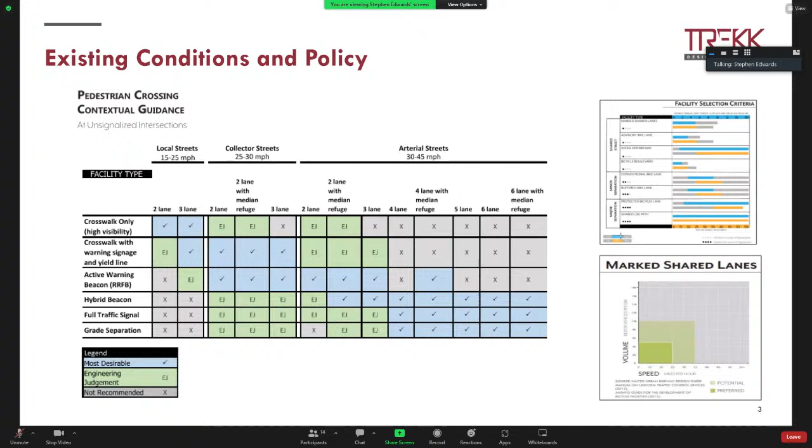Using that as our first step, we then did a peer review looking at 3 cities: Fayetteville, Arkansas, Columbia, Missouri, and Boulder, Colorado. These cities were chosen because they are all college towns with a very similar population to Lawrence, and their land area is fairly comparable. These areas were also all rated by the People for Bikes system and the Walk Score system, so you have independent agencies doing ratings and addressing how each city is applying different methodology.

Boulder, Colorado ranks very high in most of these facets, so it was a great place to adapt, look at, and understand how we can address and grow the facilities in Lawrence.

Each one of these cities provided specific guidance on how to design the infrastructure in the street, and very specific guidance on how to apply these tools and where to apply them. The decision for when to apply proven countermeasures is supported by tools such as the chart you see on your screen now.

This level of specific guidance, when coupled with design standards, provides a city with a starting point for budgeting a project and gives designers the needed tools to address the problems identified within the project limits. Additionally, these tools help ensure consistent and effective implementation efforts.

In this presentation, this is really an introduction to the project and an overall view from a high level. We looked at several different areas, and we have some general recommendations that we think Lawrence should look at to apply moving forward.

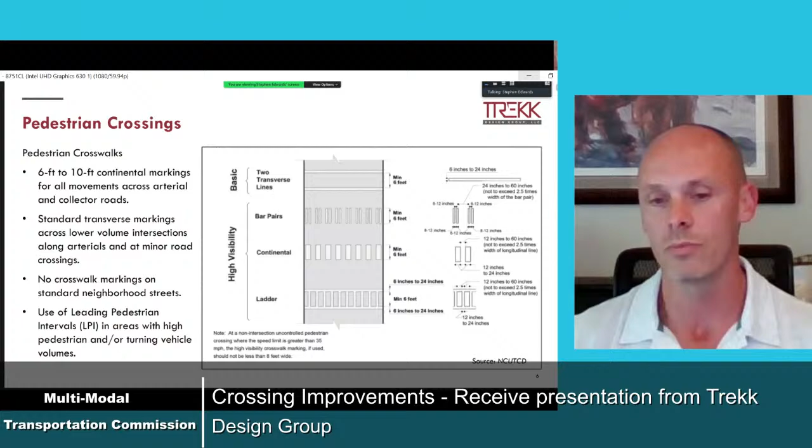For pedestrian crosswalks, you have the option of using continental high visibility crosswalks—those are the markings here in the center. Those are typically 6 to 10 feet markings, and usually it's recommended you use those at arterial and collector road crossings.

The width of those crosswalks is typically dependent upon the volume of pedestrians crossing the space—if you have a lot more people crossing, you want them to fit within the boundaries, so you make it a little wider. Another aspect you look at for crosswalk width is the visibility down the road. On hillier roads, or if you have corners and lose visibility of that crosswalk, you make it a little wider so you can see it from further away.

The standard transverse markings, shown up top, are the typical crosswalk used in most cities across the nation. You use those on lower volume intersections or along minor road crossings along the arterial. If you're going down the arterial and have local roads intersecting with a high volume of pedestrians, using transverse markings on those crossings makes sense, when it's not a signalized intersection.

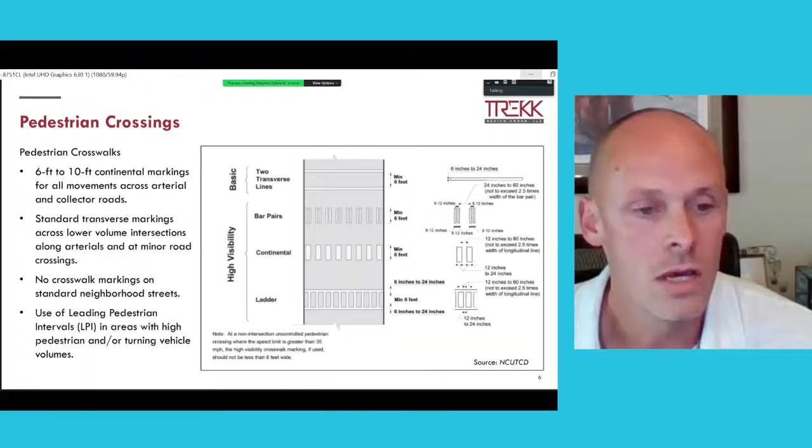On a neighborhood street within an actual residential neighborhood, typically you're not going to apply crosswalk markings. The cost and time to apply and maintain crosswalk markings in a neighborhood isn't justified, since the volume and speed on those streets should be low enough that visibility markings aren't as needed for pedestrian movement within that environment.

The last item on this slide is the idea of using leading pedestrian intervals, a signal timing method to allow the pedestrian to enter the crosswalk. You provide several seconds of time for the pedestrian to be in the crosswalk, typically 4 to 6 seconds depending on the width of the street, so the pedestrian can establish themselves in the crossing before any adverse movement is allowed. That leading pedestrian interval can be extended longer if you have a lot of turning vehicles—for example, many left turns, or if you're permitting right-hand turns and have a lot of right turns across that path, to make sure you avoid conflicting movements during that time.

Shared use path crossings change based off of where they are placed. On the screen you see a 12-foot continental high visibility crosswalk crossing.

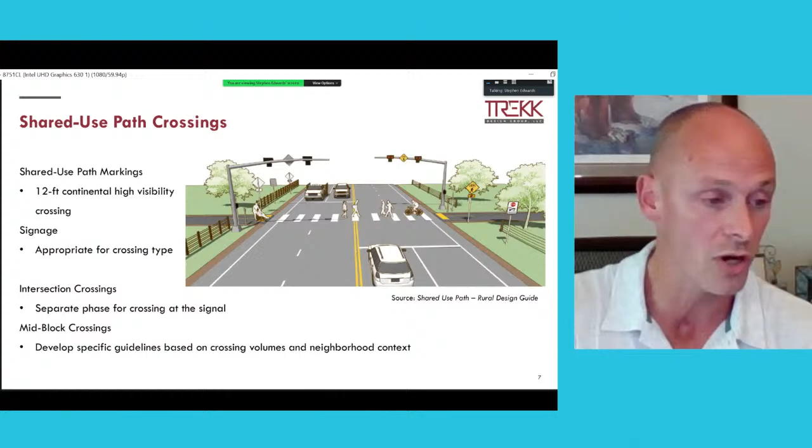The intersections may have to be modified based off of volume of turns, the overall volume of the system, and how everything works together. Typically, if you give a separate phase for that, the overall signal system often works better, because the time that the pedestrian is usually added into your green light for the road traffic goes down, and so the overall signal functions at a faster cycle time, and it just functions a little bit nicer.

So as we continue working through this process, we are going to develop more specific guidance on how to address these in these different contexts.

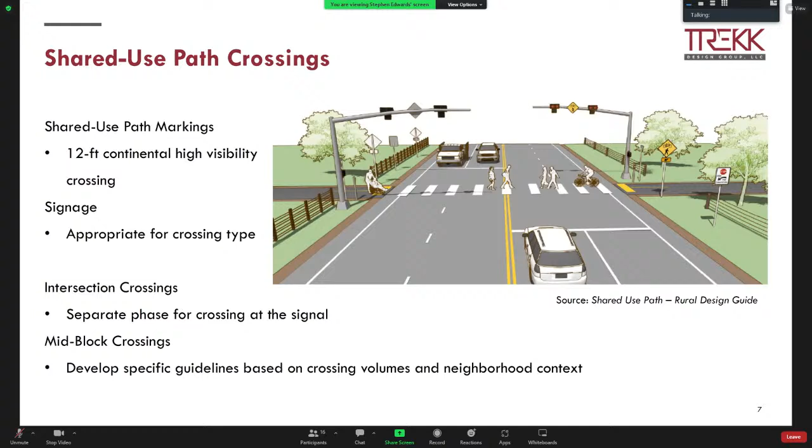Overall bicycle facility standards—how do you stripe these facilities? This is straight from the NACTO bike design guideline. This manual is, I guess, a national best practice. A lot of this was rolled into a lot of the FHWA guidance that has come out regarding bicycle design.

The determination of how much buffer space you use is something that having specific guidelines for will help with the design review process and how you're applying something standard throughout the city. So in one case, you're using something that's less than a 3-foot spacing, and you do not have to put these hatch marks or chevrons in those spaces, because less than 3 feet does not require that for visibility purposes.

Once you start expanding that, then you want to make sure that people understand that's not something you're supposed to enter into. Less than 3 feet, or a 2-foot marking spacing, allows you to just do white lines, which allows you to run your paint trucks up and down the street. The application is way faster.

But your cost for that actual implementation goes down also, so you're able to get a facility in place quicker, and you're also able to adjust that funding. So if you want to spend that money on armadillos—a small rubberized device that can go between the markings—it gives you a vertical delineation and also provides some type of hard barrier, so if a car strikes them correctly placed, it actually pushes the car back into the travel lane.

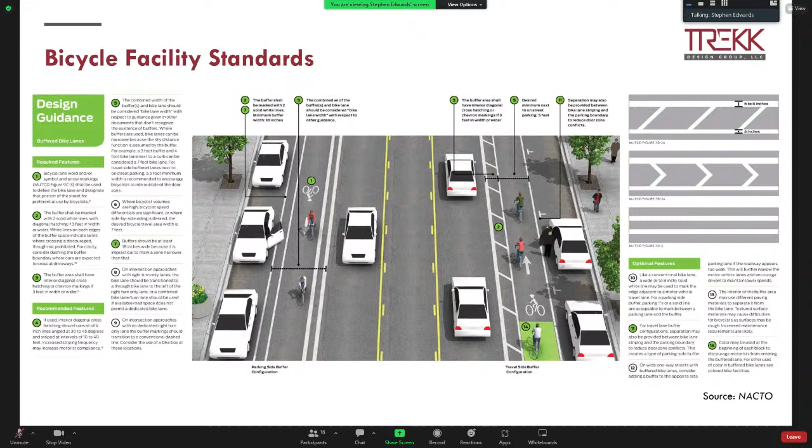As we're developing these, we'll also look at bicycle facility standards, making sure we have specific guidelines on how bicycle facilities, cycle tracks, and these paint types are used and applied in the street. One of everybody's favorites are green bicycle crossings. We adopted them here back in 2014, and started applying green markings throughout our major intersections.

We've had a number of times where people didn't think there were enough bicyclists on the road, and they didn't understand why you're building bicycle facilities everywhere, or why the extra cost for these things.

One of my favorite calls was a lady who was really happy that we identified the crosswalk on her street with extra green markings to make it very visible as she crossed, before she even got to the crosswalk. She thought it was a buffer giving additional attention to the pedestrian environment. So the bicycle facilities and these markings also provide a pedestrian benefit by making everybody more aware of the environment they're crossing.

Our general recommendation for these green markings, for them to make sense and be a cost-effective, safe solution, is that you don't want green markings everywhere. If you place them everywhere, they become second nature. Everybody's so used to them that they no longer have their natural impact on visibility. They become everyday things.

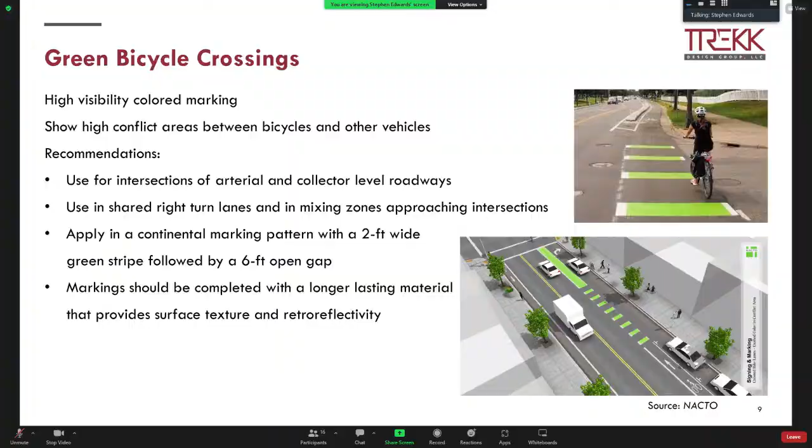Another benefit is that it doesn't look exactly like a continental crosswalk along the same road. So if you have people who are colorblind or have color sensitivity, they will not confuse those two crossings, which has come up a number of times based on some FHWA safety training I've been through. FHWA has now come in recommending this variation in style.

When you go to lower volume crossings - collectors meeting other collectors, or high volume driveways along arterials, like an arterial with an entrance to a shopping mall, if those things still exist today, or high volume gas stations - use chevrons to mark those. It's a cheaper alternative to green, and it's a lower incident area. So you're still bringing awareness, but not drawing away from the impact of the overall green paint.

This was really just to increase the volume of cars going through. A lot of our streets now have been designed to only function well if you have that right turn on red capability. So there are different changes you have to make with signal timing and even the space that holds vehicles on the street.

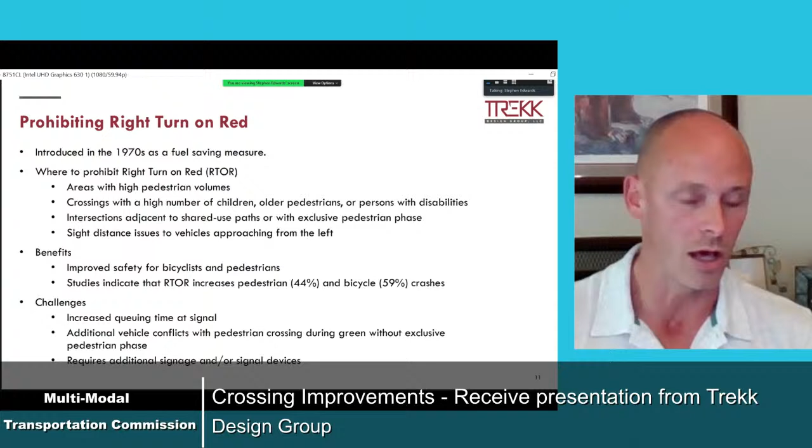So you have to have a red arrow signal up, like on a shared use path, if you're not allowing people to turn right across that shared use path a lot of times.

So where you're going to look at prohibiting right turns on red are areas with high pedestrian volumes, any type of crossing with more vulnerable users like children, older pedestrians, or persons with disabilities, intersections adjacent to shared use paths or with an exclusive pedestrian phase.

During that leading pedestrian interval, you would have a no turn on red. You would need a sign stating that and possibly a signal indicating that, or any place where sight distance may be an issue for vehicles approaching from the left of that crossing.

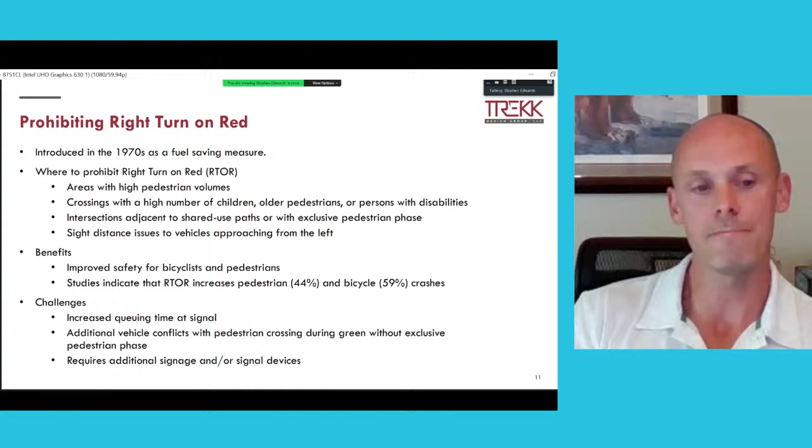So the benefits are stated here on the slide. There's an improved safety benefit for bicycles and pedestrians, where they show that right turn on red actually increases pedestrian and bicycle crashes by 44 to 59%, respectively.

Now your challenges, as I was stating towards the beginning, is the space that you have for cars to be parked there waiting for the signal to progress. If you have vehicles sitting in that space for too long, a lot of times those people will start running lights. So you have to address your phasing and timing to make sure that everybody at the signal behaves in a reasonable and rational manner.

You also have additional vehicle conflicts with pedestrian crossings during green without exclusive pedestrian phases, and you have additional signage and signal devices.

This was actually borrowed from the city of Seattle, and this same flow process is now used elsewhere. I think what we've found is that 28 cities and 13 states are using this for the road diet process. So engineers and planners, we all like to borrow from each other quite a bit.

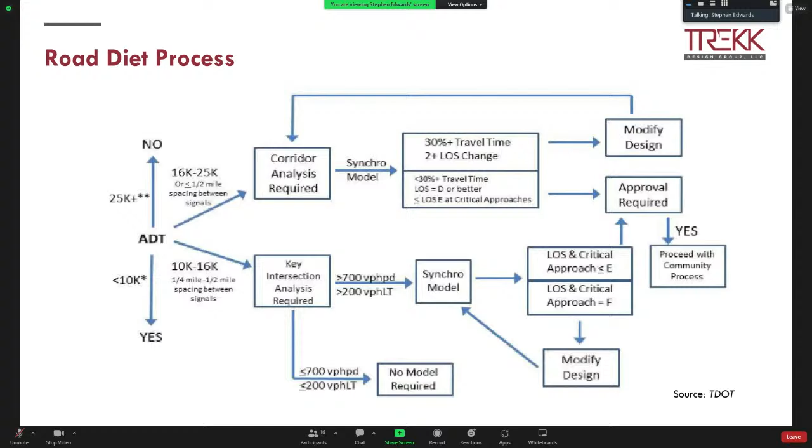Another item to think on is interim design strategies. As you're resurfacing roads, that's your fastest and easiest way to start retrofitting your streets in your city. As you're retrofitting, you're changing to bike facilities and modifying these streets.

The city did all the white and the yellow striping, which would be what we would have typically done at that time. The private group hired a contractor that went through the land development process to do the rest of these installations. What this allows is you to retrofit a street.

This was designed and implemented in less than 4 months. It went through a public process, and everything went into place. This was all built.

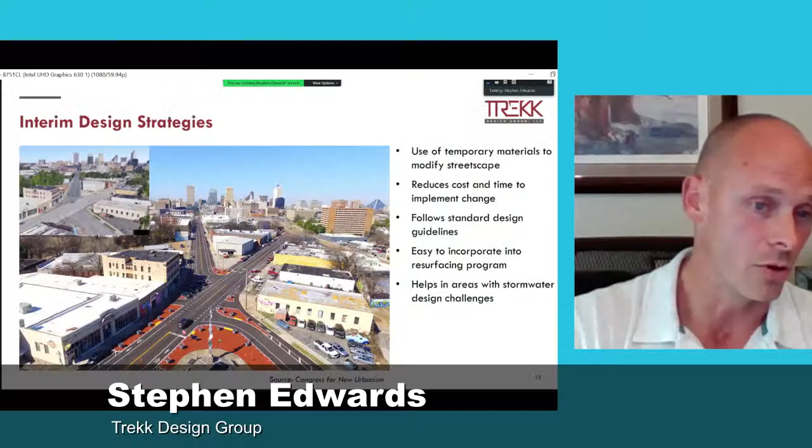This area at that time had no development. It was pretty much all empty. And now, I didn't include a new picture in here.

We won awards from Congress for New Urbanism for this project, but that's where I got the picture from. This area now has been completely redeveloped. There's not an empty building on site. Every hole has been filled in. It's full of people all the time.

So this is one way where, as you're changing the context of the streets and developing something safer for pedestrians and everybody, you can do these interim design techniques quickly. This is using a material that's used in Chicago, New York City, and a number of places, and a lot of these installations have been in for over 10 years now, and the maintenance has been exceptionally minimal. So while we say these are interim and temporary, these things actually last a long time.

And in New York City, they do this. They actually have no intention of ever replacing these, because their snow plows wouldn't be able to go up and down the street if you move the curb. So they built these to where the snow plows can operate, and then they just go out there, they move all the planters, and they put the planters back once the plowing's all done. So there's different applications you can do, and it makes it easier to run through.

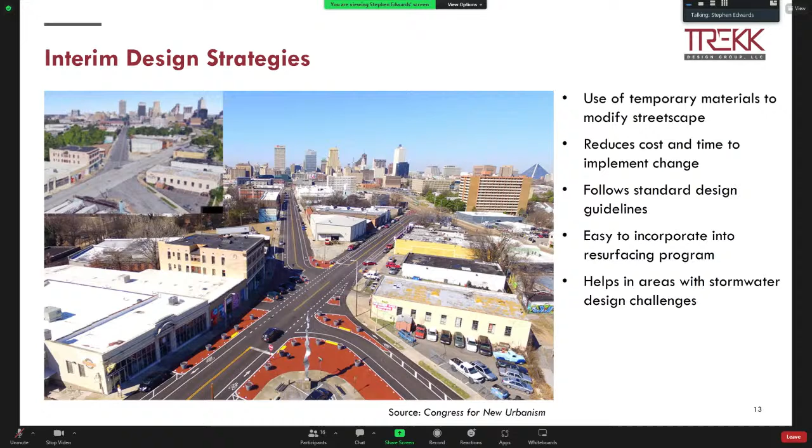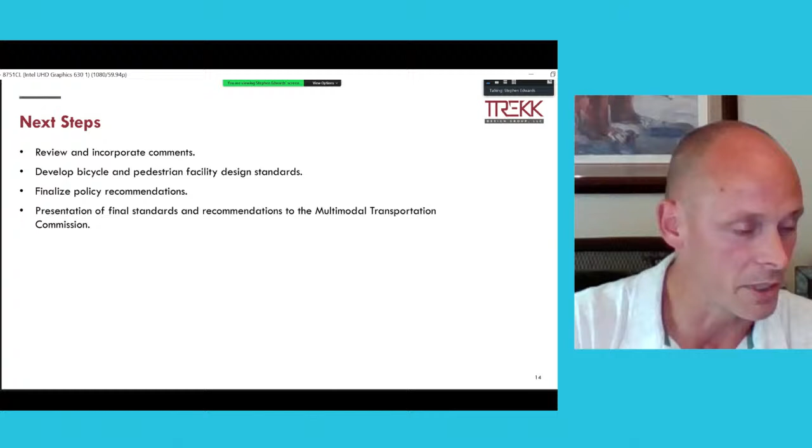So the next steps on our project are to review and incorporate any comments from this group and other groups that are provided by Lawrence. We're going to develop the bicycle and pedestrian facility design standards and finalize policy recommendations. And then we'll be back in about a month to present our final recommendations and standards for your review and comment, and proceed from there.

Do we have any questions? Any questions from commissioners?

I have a couple. The first one, in looking at the charts listed at the beginning of the presentation, I was wondering if it's possible to have a few examples, like 3 or 4 or 5 intersections in Lawrence that would have the traffic counts and pedestrian counts, so that we could have an idea of where those would fit in those criteria for those different applications.

Okay, so just doing a couple of demonstration locations where we could run through, we can provide recommendations and then develop a couple of conceptual demonstrations that you can see how they would be applied.

Correct, because it's difficult to look at the graphs and know what those thresholds are, and whether we're anywhere near those in certain intersections, and for the different kinds of treatments, what that recommendation would look like. Yeah, that makes a lot of sense.

We've looked at this before and used this as a guideline on other things we've done. I think when we looked at the crossing at 7th and Tennessee, we kind of looked at whether this fits the criteria for an RRFB. So that's an example, but I think we could do that — looking at the crossing guidance with different examples, and maybe provide that at the next meeting. Okay, great, thank you.

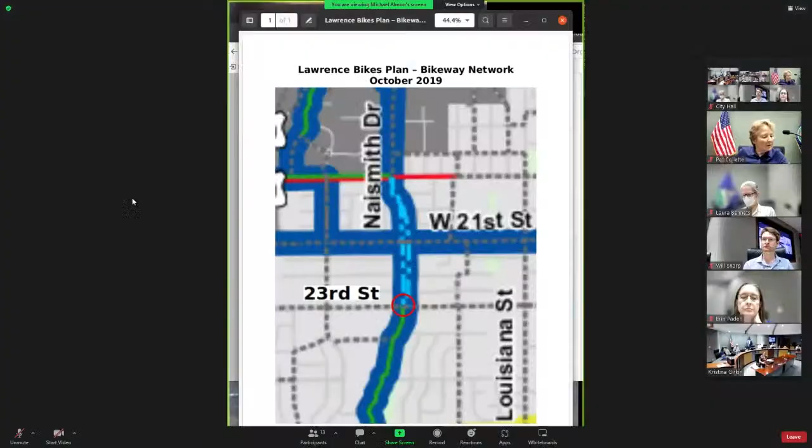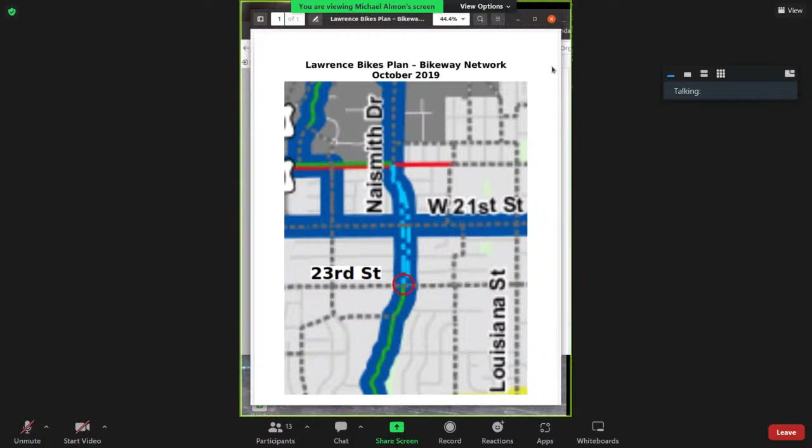There's a view of that red circle, 23rd and Naismith. It's a convergence, this is the Naismith Valley Trail. This shared use path is going to be built along Naismith up to 19th Street. But now let me stop sharing that and share this instead. There's the Naismith Valley Trail.

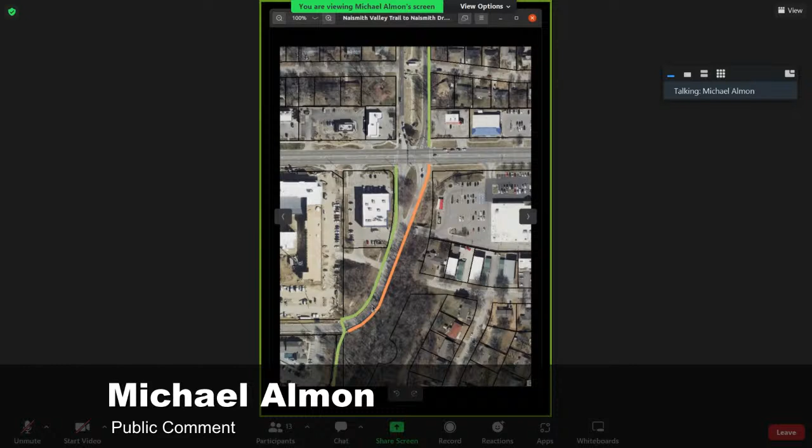It jumps across Naismith at this curve and then goes on the west side. The new shared use path is going to be on the east side of Naismith up to KU. A few years ago, when the proxy development was being built, Commissioner Stuart Boley suggested that this trail, instead of going across the street, continue on the east side up to 23rd Street. When this intersection is reconfigured, that's the time to do that. That would have the alignment continue consistently on the east side of Naismith.

This is also a nexus of bikeways. The proxy developer dedicated room for a shared use path along here. And if you recall that previous slide, 23rd Street is designated in the bikes plan as a future bikeway, so there'll be a bikeway coming across here. This intersection needs to take into consideration more than motor vehicle geometrics. I don't know what the intention is, but I think the Multimodal Transportation Commission should inquire about that.

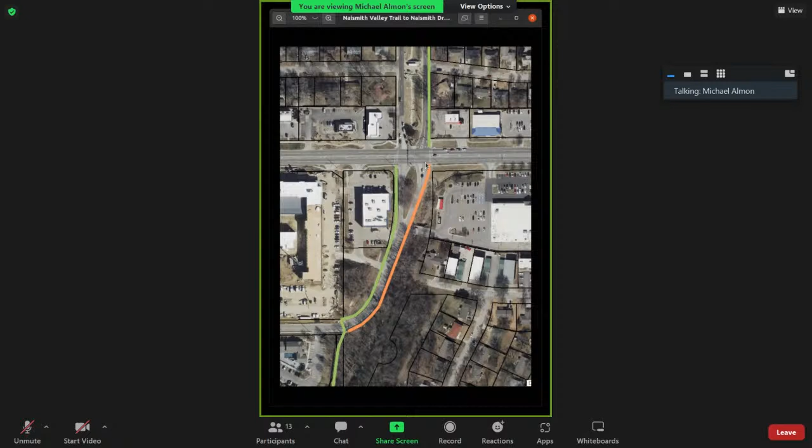We just talked about intersections. Let's design the intersections to do the safety we want to see for pedestrians and bicyclists, instead of retrofitting them later with green pavement or no right turn on red or whatever. Let's do it right to start. So that's basically my comments, and I appreciate your attention. Thank you, Michael.

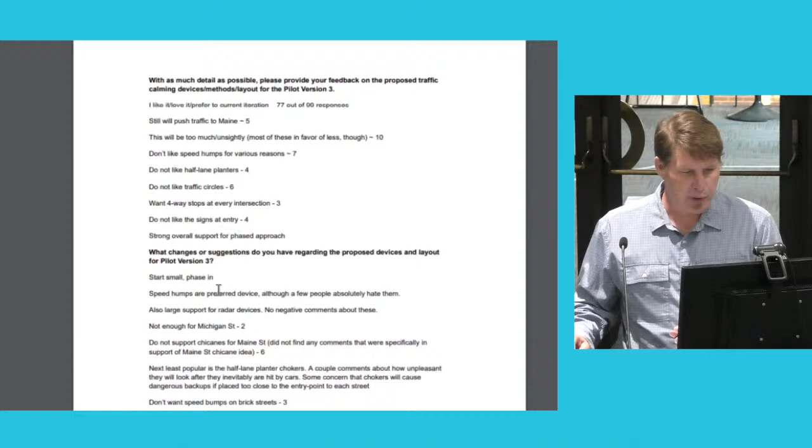I'll show their plan while we're talking about that. Their plan was the last attachment on this item. The neighborhood provided their plan and those survey results to us at our last meeting, I think last week.

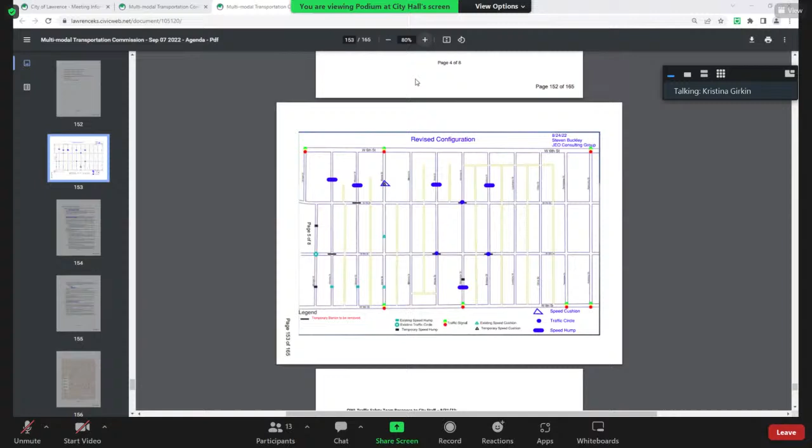At the same time, while the neighborhood was developing their plan and doing their engagement, we, the city, and our consultant JEO were developing a revised plan based on feedback we've heard throughout the process from the public as well as the neighborhood. Our revised plan is informed by neighborhood preference for speed humps—they like them, they think they're effective—so we leaned in that direction.

There's also strong neighborhood opposition to anything that restricts turn movements at the intersection. So we would recommend removing the median barriers that are out there now that restrict turns at several intersections, and replacing some of those barriers with small traffic circles—a calming effect, but not restricting turn movements, in line with the request from the neighborhood.

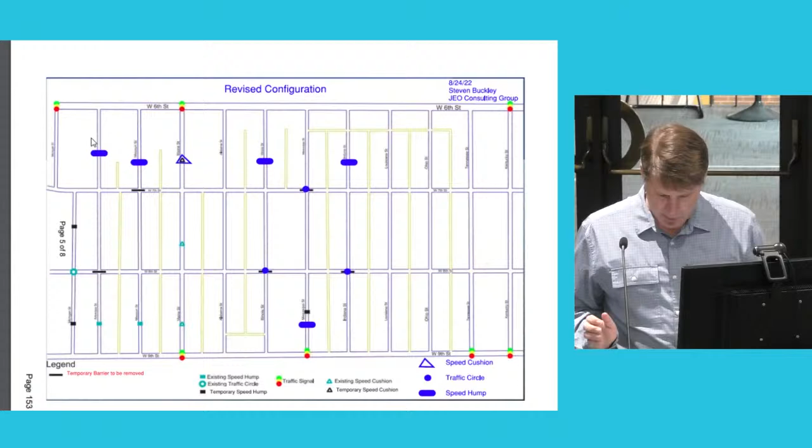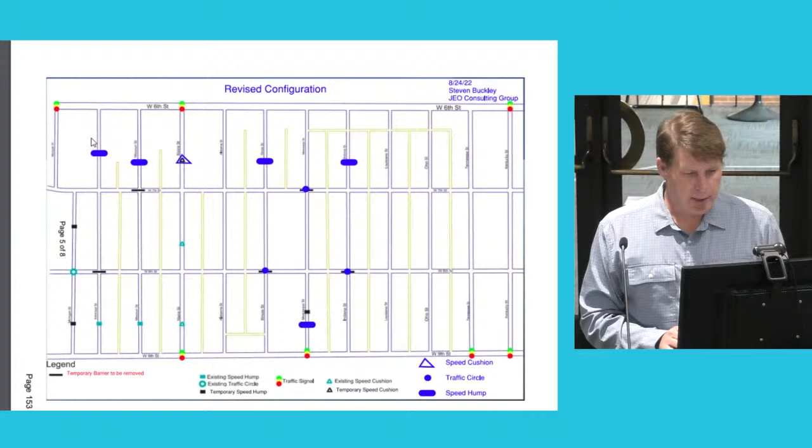So what's on the screen now is the city and JEO revised plan. It includes 6 speed humps or cushions and 3 small traffic circles. Now scrolling back to the neighborhood's plan that they've developed, it includes 12 speed humps or cushions and 6 circles.

Their plan also includes 5 half-lane chokers, which would be like a curb bump-out to restrict the width of the roadway on certain entrances to the neighborhood. And then they would also have 2 of the digital speed feedback signs, I believe both on Maine Street as you enter the neighborhood from 6th or 9th.

The neighborhood has requested to do a pilot of their full plan, similar to the 2 previous iterations we've done, where we would try to configure these traffic calming devices using our temporary materials, collect another round of data, potentially a scaled down data collection effort focused on the higher volume streets of Michigan, Maine, and Mississippi.

Moving forward, we have a meeting scheduled for next Thursday evening again with the neighborhood, city staff, and JEO to continue the discussion of our plans. We'll have cost estimates for both plans at that point and try to fit that into a schedule of being able to implement and complete this year. With that, I'd open it up to questions for myself or Dave.

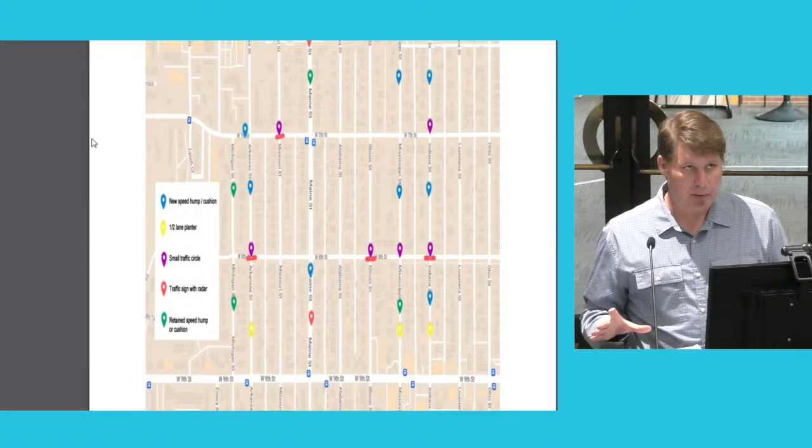The other challenge is both plans are recommending small, like 20-foot diameter traffic circles in the intersections. The 20-foot diameter would be the traversable apron that larger trucks and emergency vehicles could traverse, and then there would be a smaller, 6 to 8 foot diameter circle that's a barrier you could not run over, fitting in the footprint of the existing intersections. But we have not determined a way to configure those in a temporary manner. The traversable apron is the challenge of getting the right impact for smaller vehicles to navigate while still being traversable mainly for emergency vehicles. That's another challenge with implementing either plan in a temporary configuration.

Getting accurate speed data would be difficult, but we could get volume data. In our discussion, the neighborhood will have comments, but what we heard is they want, when we put in the current configuration, it diverted traffic to Mississippi, Maine, and Michigan. If we were to remove those, what we've heard at our last meeting was the ability to go back and say the volumes would spread across the streets as they were before we had those diverters. We've seen volume increases on those streets, Maine, Michigan, and Mississippi, and that was part of the data collection discussion we talked about last week, to show that volume has gone back down on the streets that were diverted under this last installation.

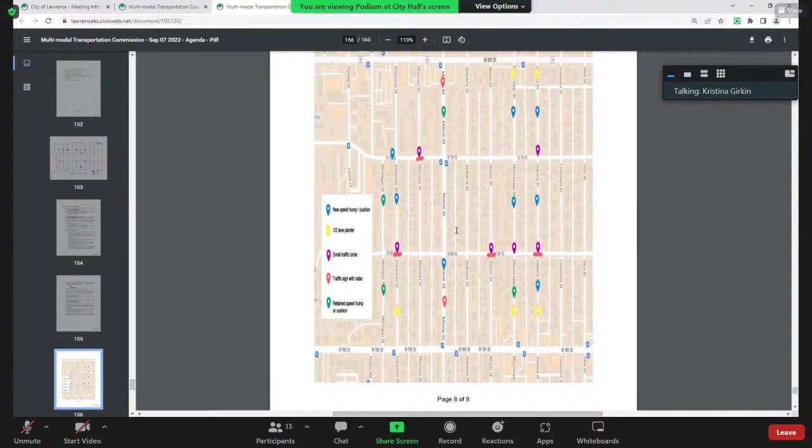How about the planters? The half-lane planter, they have five in this proposal. Is that something that would be easy to construct, to be able to see how that impacts traffic in there? I believe so. It'd be similar to what we've done on 21st Street Bike Boulevard, where we've got little islands and constricted the lane, kind of where parking would be. So that would be a matter of using the rubber curbs as well.

So I guess my thinking on this is this is our pilot for this whole program, and it needs to be a process where we're working with the neighborhood to figure out what's best to calm traffic neighborhood-wide, not just on a single street. Before this, traffic calming was taken on a street-by-street basis, and sometimes had a spillover effect because it wasn't thought about in a broader context. So I still feel like we need to stay the course of trying to think neighborhood level instead of street level.

But it also seems like we're needing to be careful to set expectations right with neighborhoods, that it is not an unlimited budget. And there are rules that have to be followed for what sorts of traffic calming is even appropriate on any given street. But within that, I think it's okay to go past the budget and create a list of unfunded elements of a plan, which is fairly common. The question of funding, I would hope, doesn't get in the way of getting clear on what would make sense for the neighborhood. There's lots of ways to think about funding. A lot of that's not in our place to decide.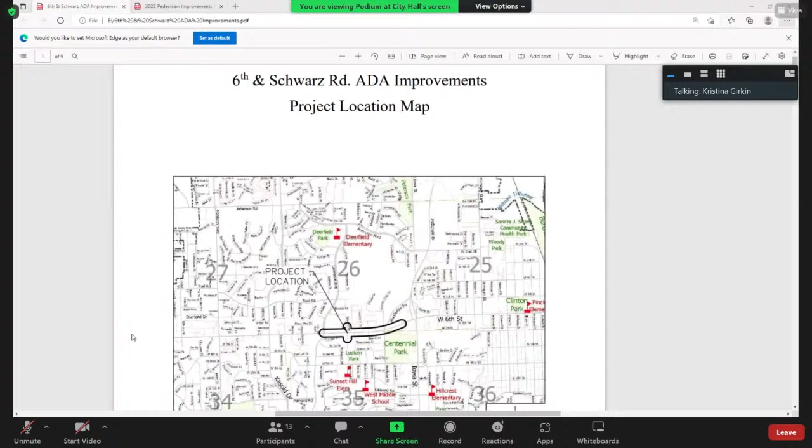The timeline for this project: we currently have the office check plans. After we've gone through those, we plan to make the revisions and put it out for bid. We're hoping to begin construction in spring of 2023.

So if we look briefly at the map of the project location, the top of the screen is north. We can see going from Lawrence Avenue, moving east just past Rockledge, and the intersection reconstruction at the intersection of Schwarz. I'll be going briefly through the plan sheets to take a look at the project more in depth.

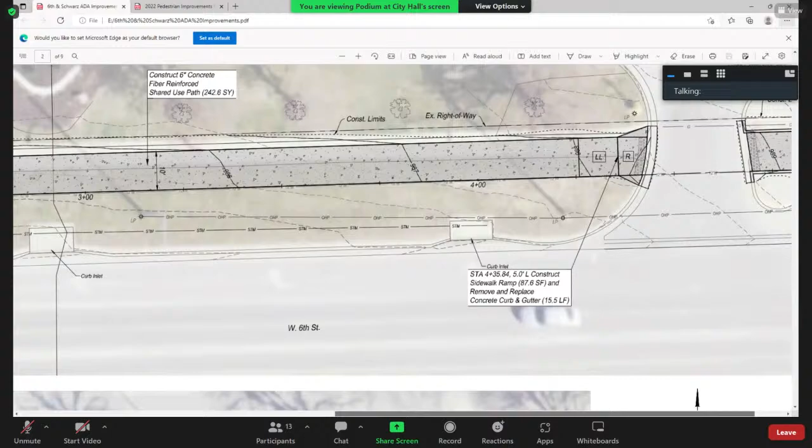So we're going to be beginning at the intersection of Lawrence Avenue and 6th Street with the construction of this ADA ramp, and begin replacing this 4-foot sidewalk with a 10-foot shared use path. Moving east, we'll come here, it's going to move through the entrance of the Dillon's parking lot, the west entrance.

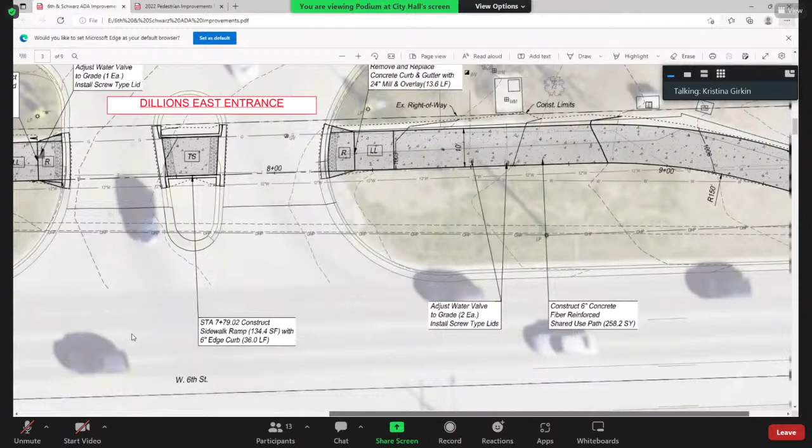Next plan sheet, we continue along, going across the east entrance of the Dillon's parking lot. Continuing along with the shared use path, we have our intersection at 6th and Schwarz. We'll be looking at that a little more for the reconstruction plan sheet. But for now, we're just showing it continuing along the north side of 6th Street.

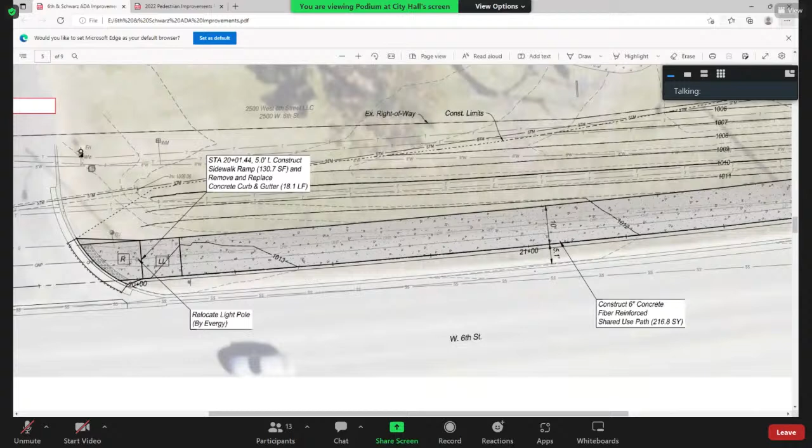And again, continuing along from the intersection at Schwarz, we have a reconstruction of the apron to make sure it's ADA compliant as it continues along our shared use path, as we go across the Tuckaway apartment complex. Continuing along, another approach is being rebuilt as we continue our shared use path, still at Crestline Drive, leading into an apartment complex.

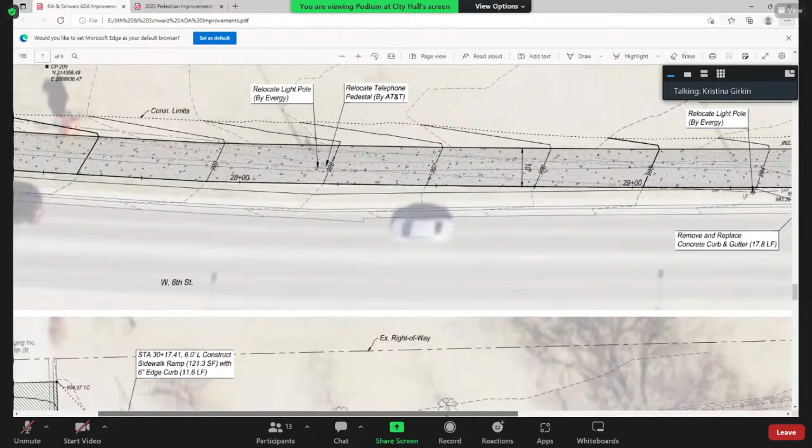On the west side, here's the east entrance to the apartment complex, again rebuilding approaches as necessary. Continuing along, we have our ADA access ramps, our crossing going across Rockledge Road, and continuing to the east, we'll come to the end of the shared use path, as you can see along here at Garber Automotive.

We will be tying into an existing shared use path that exists over here on the east end, and that'll conclude the limits of construction going west to east. On this final plan sheet, we have the intersection being reconstructed at 6th and Schwarz, putting in the new ramps and crossings and everything to make it ADA compliant. So that's a synopsis of what we're doing in the office check plans we're looking at. Do you have any questions?

I have a few, so sorry. This is my neighborhood, so I'm pretty familiar with it.

Kind of related to our study session, in terms of the markings and pedestrian amenities across the major driveways. For instance, Dillon's is one where it's a very wide entrance at two places, and whether those will be marked with crossing markings in those areas where there's higher volume.

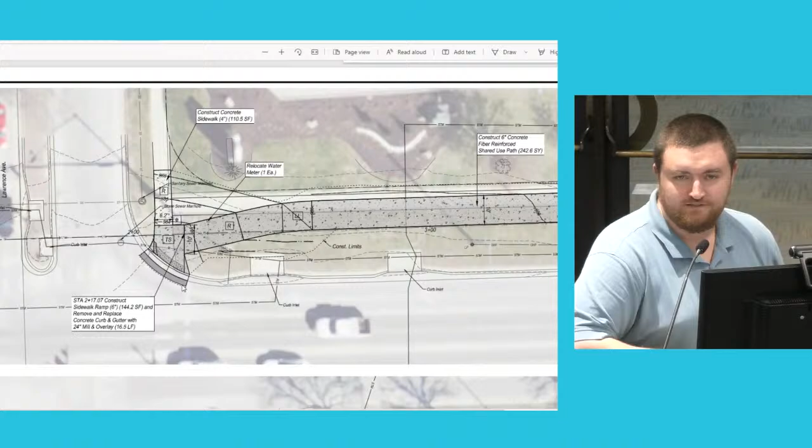Okay, great. I couldn't quite see where it was pointing to, and I didn't think all the rest of it was concrete that you were replacing with mill and overlay. That's on the crossing street itself. Yeah, okay.

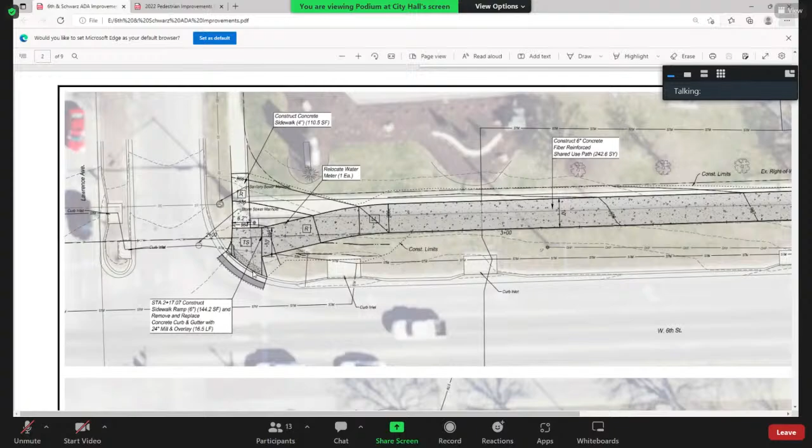And in general, at the signalized intersections along the way, in a couple of places I could see where the signal pedestals were placed, but there are several places like at 6th and Schwarz where it's very difficult. Where it is now, it's on a pole on the northwest corner, and it's difficult if a cyclist is coming up on the street to get over to trip the signal.

You have to get off your bike, and then if you don't make it in time and it turns green, by the time you get back on your bike again, it's a short signal if the pedestrian button hasn't been pushed, and so you miss the light.

So I just wondered whether you're going to do like you've done on other intersections, where you have a pedestal that's more accessible to reach either from the sidewalk or the shared use path.

We can make a note of that, but all the ones that are currently planned to be installed are going to be ADA compliant, so they're meeting all those regulations.

Yeah, in instances where we've had to move the curb ramp or realign it, and we've had an existing button, it wasn't ADA compliant. Sometimes you need to have a level landing area next to it, 4x4 I believe, and it needs to be within a certain proximity of the ramp.

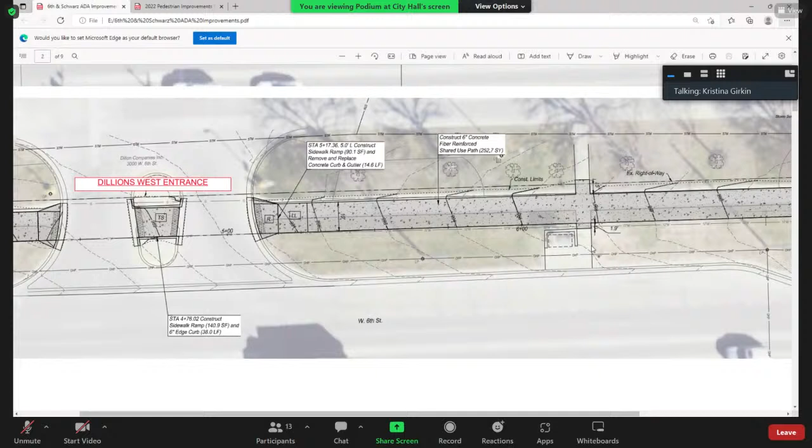I have a question about the entrances to the businesses. You mentioned that you don't typically put any treatment there for people crossing that entrance. Is it possible to keep the crossing elevation the same so it essentially heightens the visibility of pedestrians, or will they be expected to walk down into the street level or the entrance level?

I'm not entirely certain. Was there a crossing in particular? Well, you were mentioning Dillon's. Just wondering, would it help at all to have the pedestrian path stay level as it crosses those entrances?

That's a good catch. What these plans don't show is pavement being replaced through those Dillon's parking lot entrances, and I don't think our designers have shown that as an ADA compliant pathway. So I envision that being a change on the final plans, with that pavement reconstructed to a cross slope that's compliant.

Well, I was thinking more of just maintaining the level of the sidewalk, so instead of sloping down, keeping it straight, and cars can drive over that. The stormwater, for the city, would still be in the street—the parking lot is Dillon's problem. Right, essentially the existing curb line is going to stay at the same elevation. You'd see some minor tweaks to get the cross slopes needed for the ADA ramps, but otherwise it would be staying at the same location.

Hi, this is Drake Prebyl. I had a couple comments to make on this item I'd like to bring to the Commission's attention. First, at the very east end of the project, next to Iowa Street, where there's the existing shared use path, there's not currently a crossing—like the bump mat for blind people—to see where the edge of the curb is. It seems kind of silly that we build the project right up to where we left off and don't finish that end off. And then the other thing is I appreciate all of Charlie Bryan's comments regarding the raised crossings.

There are several business entrances and residential entrances along this street, and one of the biggest dangers for pedestrians and cyclists is cars turning in and out quickly without looking. So anything to help draw attention to the crosswalk is a good thing in my mind. Other than that, I'm really looking forward to this project—this is an area that really needs it, given the amount of bikes I see on the sidewalk already. Thank you.

Is there any possibility of adding in—I know it wasn't in the project scope—but is there... It's a commercial entrance. We don't typically put detectable warnings on commercial entrances, that's correct. I took note they're kind of shown that way on the plans, to have warning panels, but typically our standard is not to include those.

Those are for public intersections—we've not included them on commercial driveways. There are instances where they've been put in before on site plans, but our standard is not to include those on commercial or residential driveways. So we do see those all over the place though—those shouldn't be there in any of these illustrations? They should not, on commercial or residential driveways.

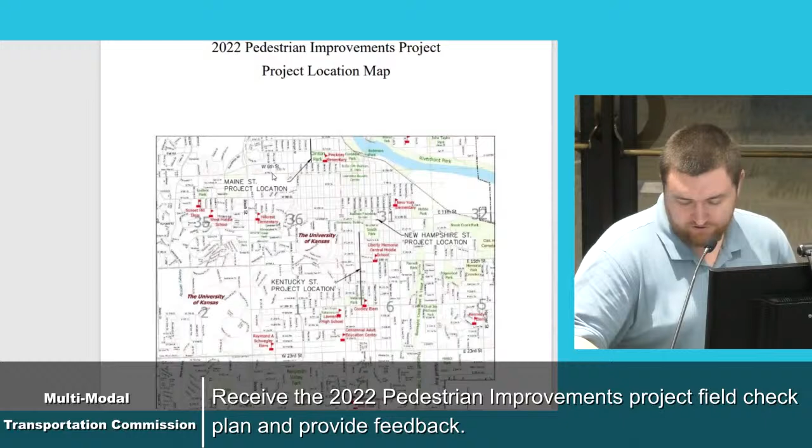Okay, I'll be presenting these as well. Anthony Schuler, project engineer with MSO. These are the field check plans for the 2022 Pedestrian Improvements Project. This project consists of 3 components: a sidewalk replacement along Kentucky Street, filling sidewalk gaps on Maine Street, and the

installation of 2 crossings on Louisiana Street and New Hampshire Street, respectively. The timeline for this project is we currently are looking at the field check plans. Next will come office check plans. There will be bid after that. We're also planning on this one being constructed ideally in the spring of 2023.

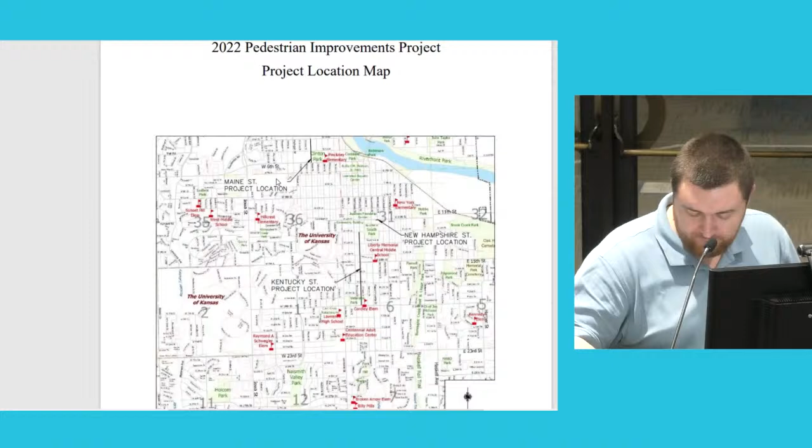If we take a look at the map right here, once again, the top of the screen will be north, and we can see the different locations that we'll be doing the sidewalk filling on Maine, the crosswalks on New Hampshire and Louisiana, and the primary bulk of the project being the sidewalk replacement along Kentucky Street.

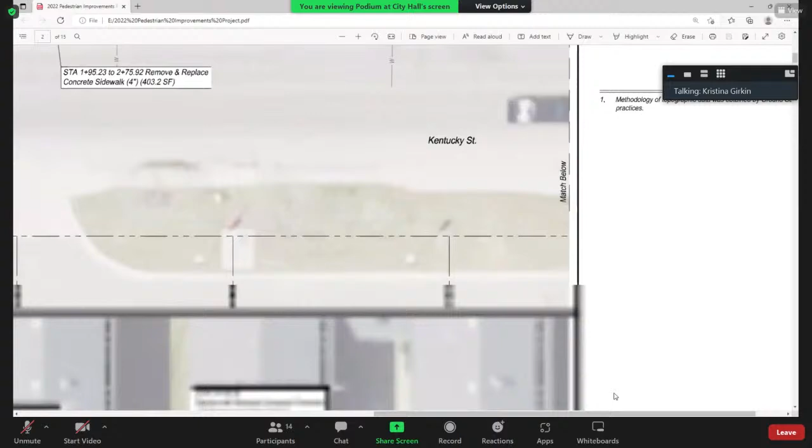Take a brief look at the plans once again. We'll be starting right here on the intersection of 19th Street in Kentucky. Now, north is going to be the right side of your screen. So as we continue along north, we'll be going along the west side of the road, constructing a 5-foot wide sidewalk, replacing the approaches in the driveways as necessary.

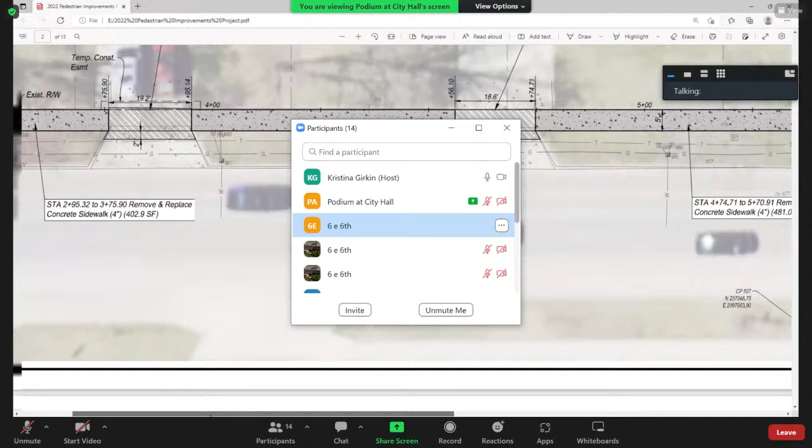So we continue on the plan sheets, continue with our sidewalk, continue with our approaches, still along the west side of Kentucky going north. Coming here to the intersection of West 18th Street, reconstructing the ramps here and crossings to make those ADA compliant, continuing along both on the east and the west side now of Kentucky, continuing to move north.

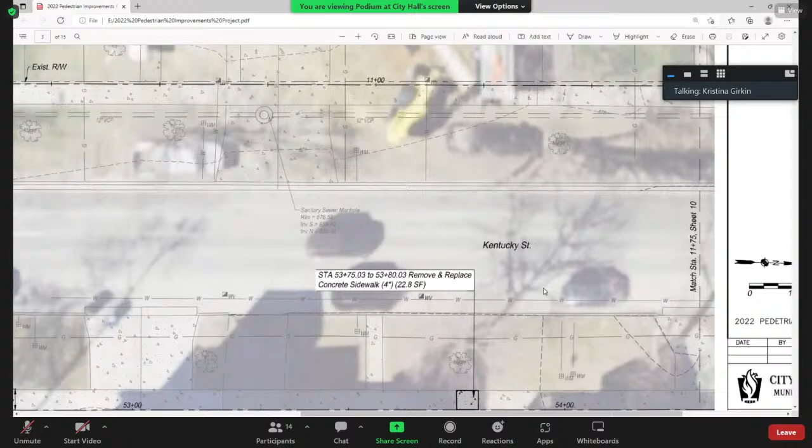Continuing likewise, making improvements, replacements where necessary. Continuing still, making on both east and west side, moving north, replacing sidewalk, repairing drives as necessary. Crossing here along West 17th Street. We have our ADA ramps on both the east and the west side.

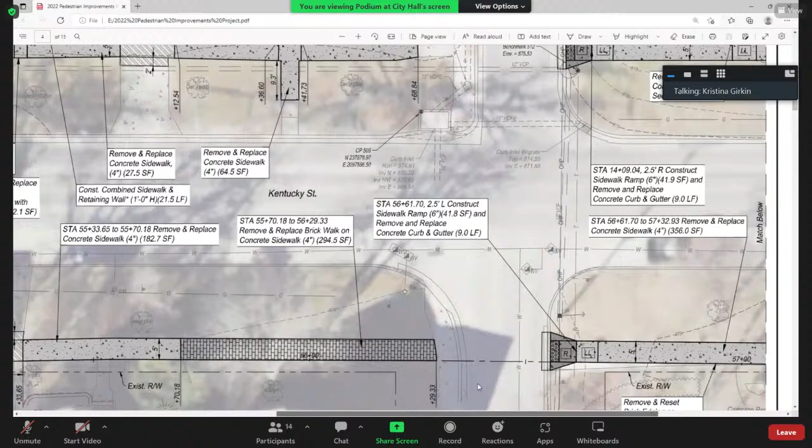Continuing likewise, going north along Kentucky, still on both sides. Continuing still. Coming here to the intersection of West 16th Street, installing once again ADA ramps on both corners. Continuing to the north, we've stopped construction along the east side and we're continuing along the west side of Kentucky, still going north, still replacing drives as needed to make them ADA accessible.

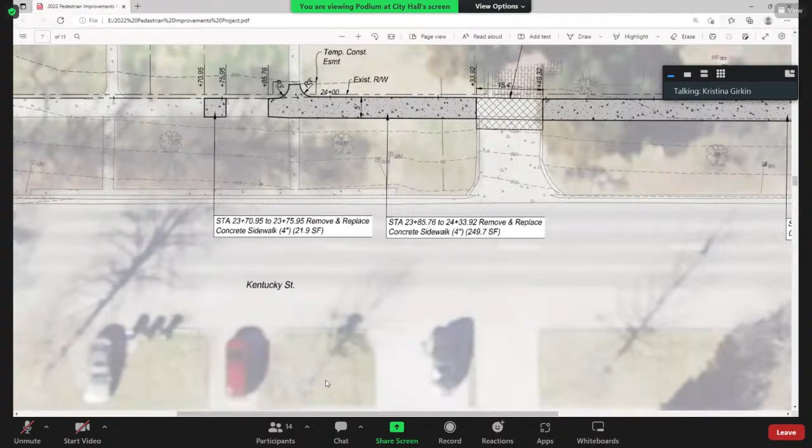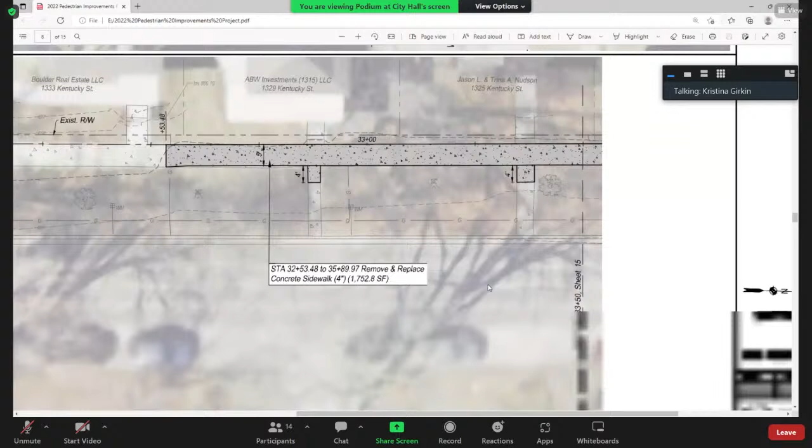Continuing still to the north along the west side of Kentucky, making replacements and improvements where necessary. Continuing still just along the west side as we pass 15th Street. Coming now to the intersection of 14th Street, again, we're installing new ADA ramps to make this crossing compliant. Continuing still along the west side of Kentucky Street, going north.

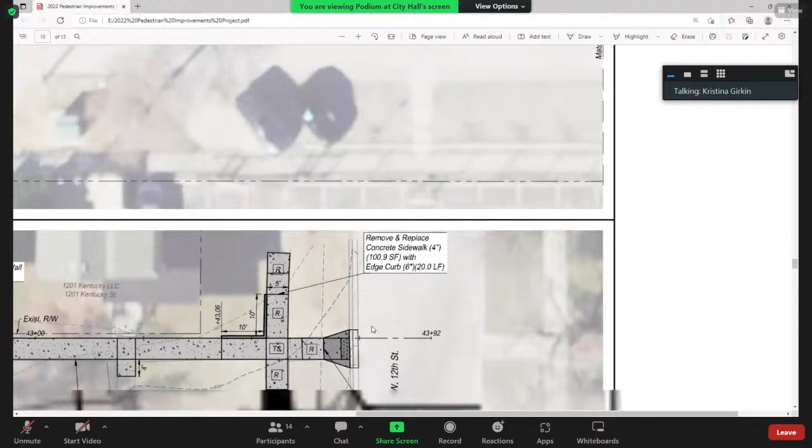Continuing still. Coming to the intersection of West 13th Street. Once again, replacing and installing new ADA ramps to make this compliant. Along the west side, continuing on Kentucky Street, going north along the west side. And here we come to the end of the project where we'll be installing the ADA ramps here at the southwest corner of West 12th and Kentucky Street.

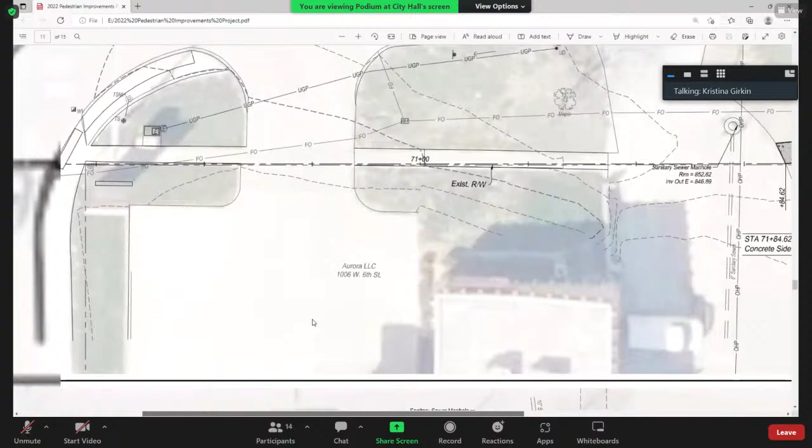And that concludes that portion. Here we have the Main Street portion of the project. Here, once again, north will be to the right side of the screen. So we're looking here on Main Street. Our sidewalk we're installing right along here, 5 foot wide, is going to be on the east side. And once again, like before on Kentucky Street, we're continuing along the east side. We're replacing drives as necessary to make them ADA compliant, installing our 5 foot wide sidewalk as we go.

Again, coming up here to the intersection of West 5th Street, installing ADA ramps, replacing drives as necessary. Continuing along still. And we see where it concludes here with the installation of this ADA ramp.

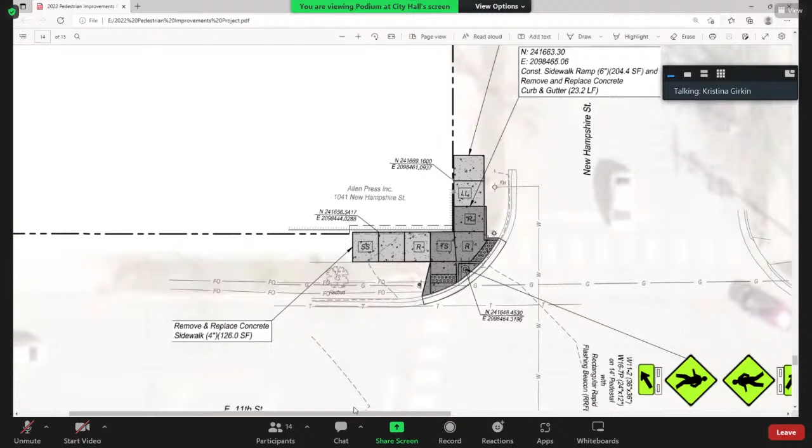Moving along to the next site, we have the intersection of New Hampshire Street and East 11th Street, where we'll be installing a crossing going across 11th Street. And we have new ADA ramps being installed at this intersection. Rectangular rapid flashing beacons installed here.

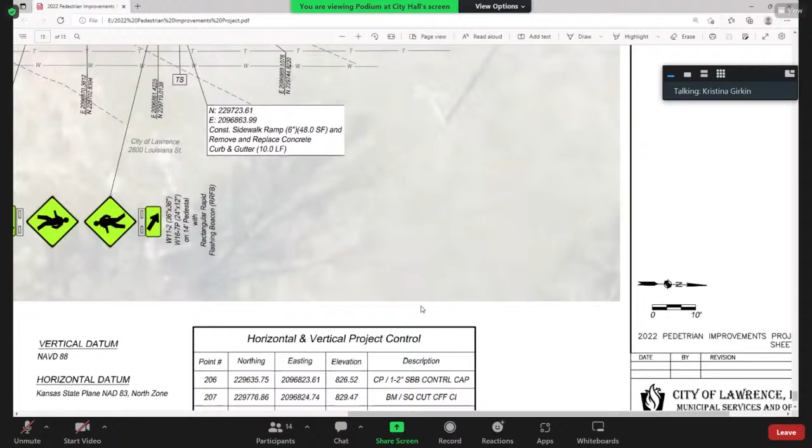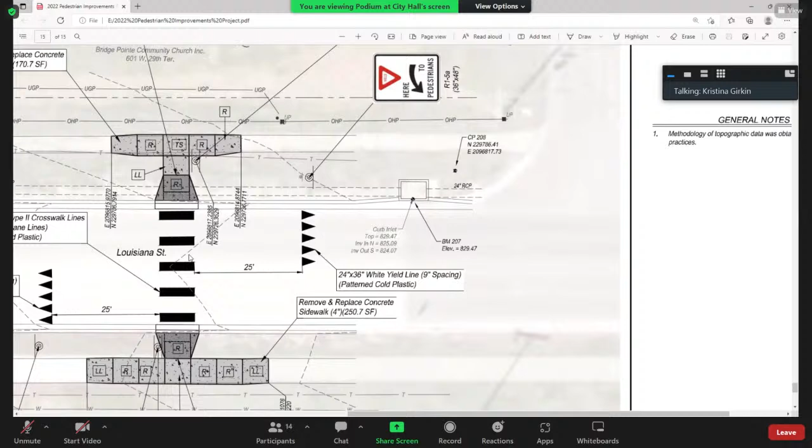And the final site here along Louisiana Street, and once again, north is still the right side of the street. So just to the south of West 29th Terrace, we'll be installing a crossing right along Louisiana Street with sidewalks replaced as necessary to get the ADA ramps compliant. And that concludes the plan sheets for this project. Do you have any questions?

Got a question for the brick. I noticed at least on the Kentucky plans, there were some brick sidewalks. Is it whenever a brick sidewalk is a piece of the current sidewalk, will it be taken out, or if it meets certain standards, will it stay in place?

Currently, we're planning on replacing brick sidewalks where we can with concrete because they're more ADA compliant and consistent with current code with the city. The residents are going to have the option to keep the brick sidewalks if they wish to do so. We're going to be sending out letters to them to discuss whether or not they want to assume the financial responsibility of maintaining a brick sidewalk or allow us to go back with concrete.

The conversation on the brick sidewalks really starts with an evaluation if it's a historic property or in the historic environs or in an urban conservation overlay district. We reach out to Lynn Zollner, the Historic Resources Administrator, and get her take on all of these. We can look at the maps and figure out where we need to put those back, but we like to get her confirmation.

1700 Kentucky is the property that's, I believe, in the environs. That one's going to have to go back brick. There are maybe one or two other properties with brick sidewalk. I keep thinking of the one on the 1700 block - it's the only brick sidewalk in the middle of 12 properties of concrete. So it'd be our intention to reconstruct that at concrete, but we'll reach out to the property owner and get their input.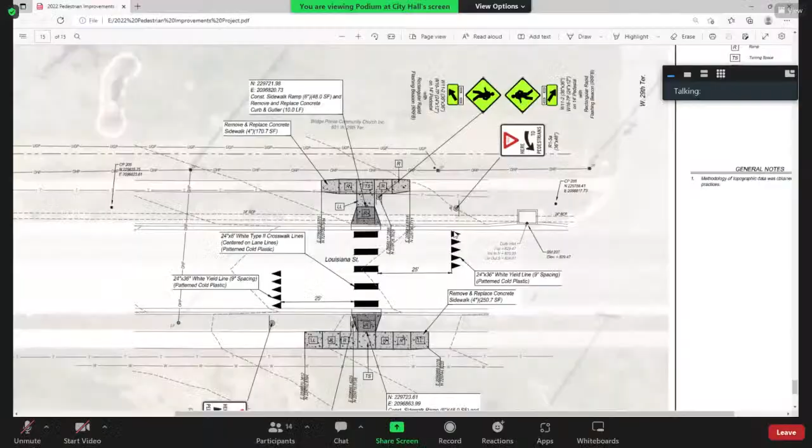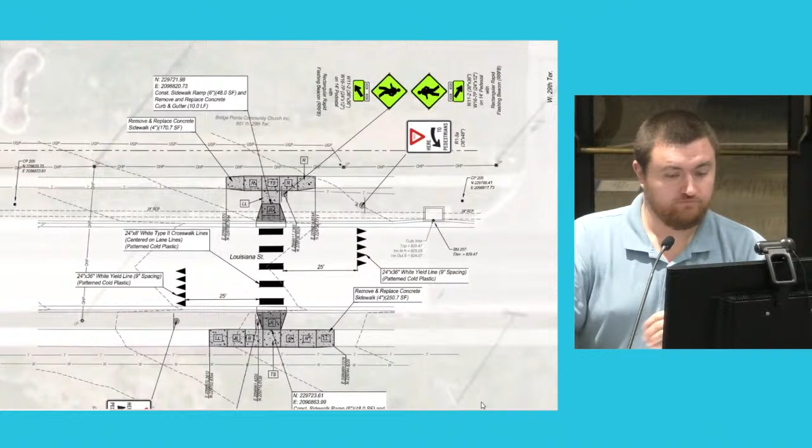And it's just to the north of the driveway that goes in there? Of which driveway - where does the crossing... just help me get oriented, is it right where the church is, or is it like...? It's south of West 29th Terrace and just north of the church entrance. So essentially mid-block crossing? Yes.

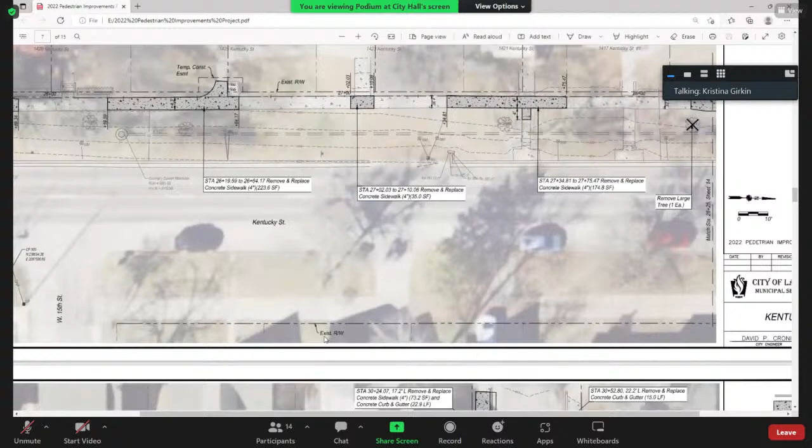I had a question about 18th and Kentucky. I don't know if you can bring back the visual for that. It seemed unusually complex, and I was curious to understand that - it's more winding instead of a straight crossing pattern. What's going on right there at that corner?

Yeah, that's something we discussed with the designer already. It's been in our comments we sent back to them, and they're looking at it. There's some infrastructure and things there that's making it difficult to get a more traditional ADA ramp in, but we're looking into that to see if we can get something that looks a little more traditional.

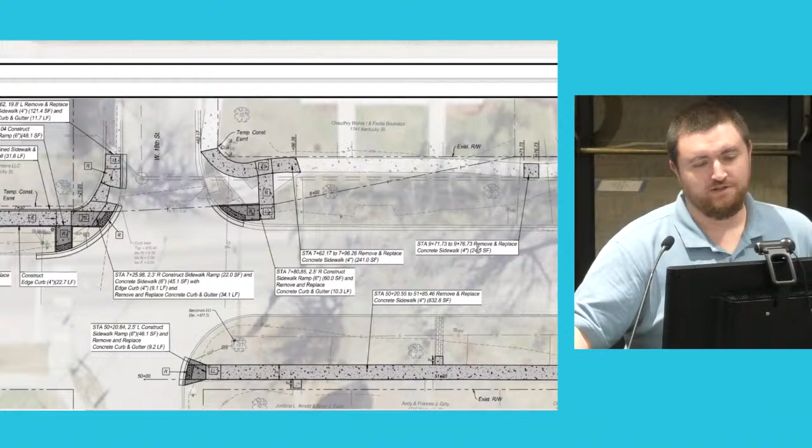Okay, and then that's the east side? North would be the right side of your screen. So this would be the west. Okay, the west, all right.

So crossing then to the east, it doesn't appear that there really is a crossing? That's another comment that was submitted to the designer - these crossings aren't particularly leading somewhere, so we need to make sure that access is available. So the goal would be that you can cross all four directions at that intersection? Ideally. That would be great. I think that intersection just kind of jumped out at me.

I can't find the reference now, but it's roughly in that same area of 1700 Kentucky - I don't know if it's on the right or left or the south or north side - but it referenced crushed rock surfacing. I know what that surfacing is, but why is that there, I guess?

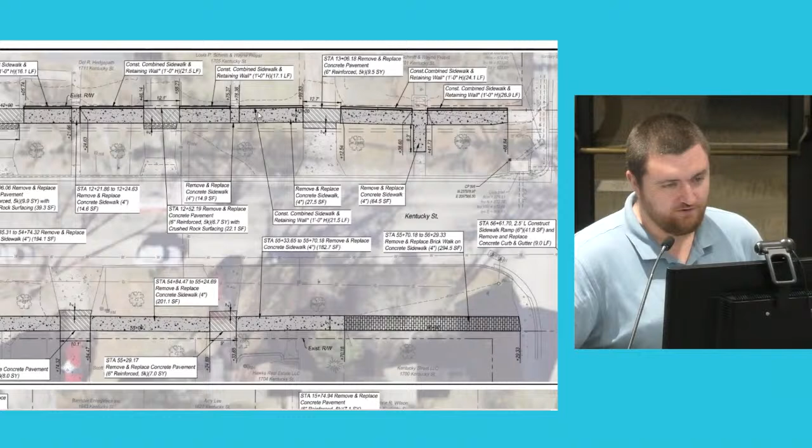If you look right here on the plans, you see the sidewalk going along here. The crushed rock is this little portion along here in the driveway, and it's just to fill in the driveway so it's flush with the sidewalk that's going to be going through there.

Commissioner, essentially the existing driveway is gravel right now. So we're putting concrete through there and then putting in some rock next to it to tie into what's there already. Okay, kind of like my question about 6th and Lawrence - it's just filling in around the... yeah. So the sidewalk itself is concrete? Yes. Okay, great.

And a couple of different locations about removing large trees. Is it practice to replace those trees? We haven't addressed that at this point. We're going to be removing them, and then down the line, when we get the office check plans, we'll be talking with Parks and seeing what they want to do, what their plan is for putting those back.

Okay. I have a broad question. So office check plans, field check plans, can you help us understand? It sounds like there's a real method to them, to your profession. So what are these distinctions?

Yeah, so Commissioner, you're probably used to getting field check plans from us, which are probably 50%, is what I think Dave would probably say. In the case of the 6th Street project, we started off as just an intersection project, and our designer had done a lot of work on it, and then we added in the shared use path. So we're presenting office check plans, more 75, 80, 90%, a lot closer to final design. There's more detail, ramp elevations, those sorts of things. So really it's just terminology on how complete the plans are. It's a little bit subjective. Got it. Thank you. So office check is more complete than field check? Yes. Okay.